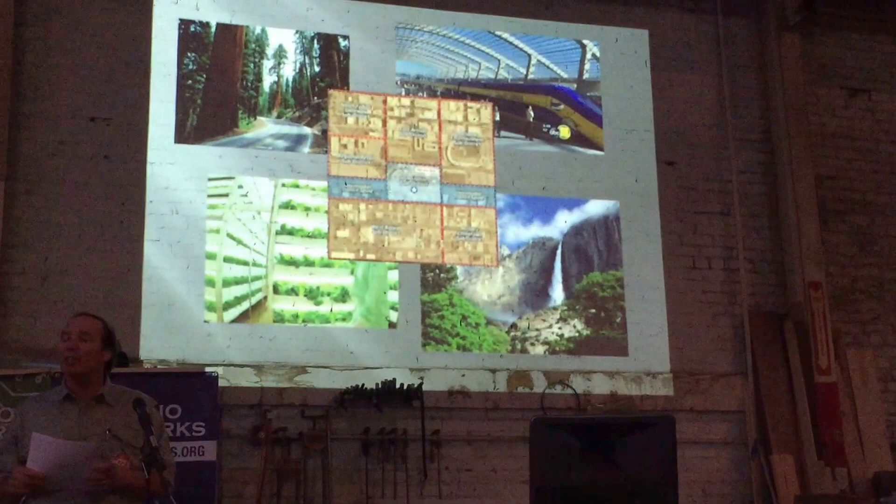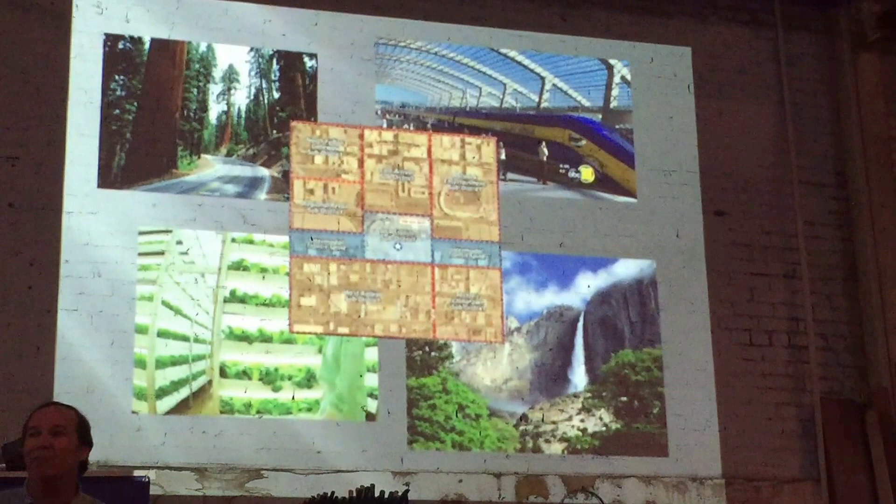All right, so our site plan is generally located in and around the high-speed rail station, close proximity to Yosemite, Sequoia National Park, and Kings Canyon National Park. We want to capitalize on that because we have a lot of visitors coming in through California. In fact, last year Yosemite Park alone received 4.2 million visitors, so it might be a good thing to get some of those folks to stop by our site.

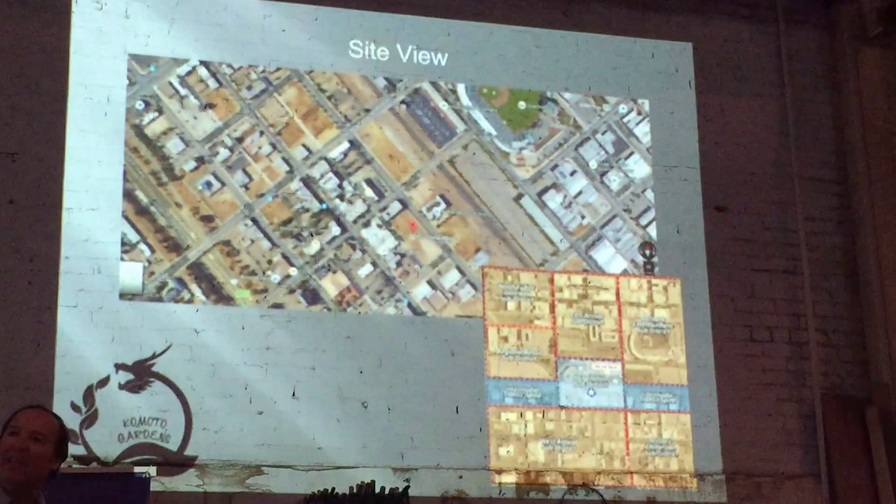Next slide. Okay, here's the aerial footage of the site, and we are the red dot up there if you can see it. That puts us exactly in the proximity of the high-speed rail station.

So there's going to be special zoning, and our zoning at the site was RMX for residential mixed use. The zoning required us to have a height restriction of 75 feet, so we had to work within that, couldn't go up too high, and also limits on the number of residential units. Believe it or not, we have 37 residential units in here.

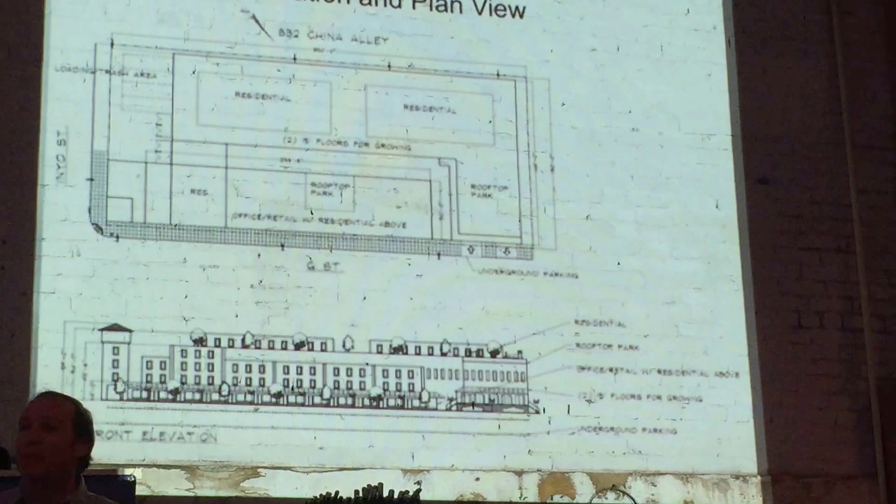Can I have that laser pointer, please? Just push the red button. And right about there is going to be my spot. Right there, that's going to be my new place. That's it, I'm buying in on this one.

And let's see, we also provide on top of the rooftop the solar arrays, and that'll be about 23 feet for the solar panels.

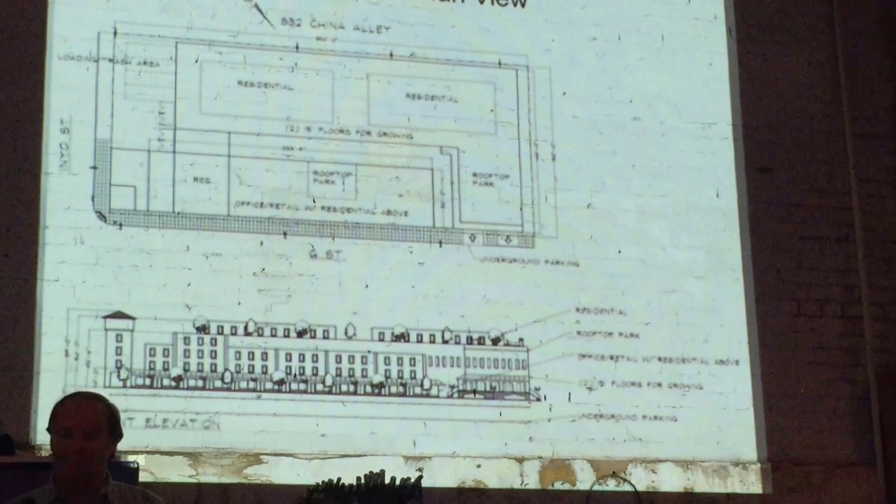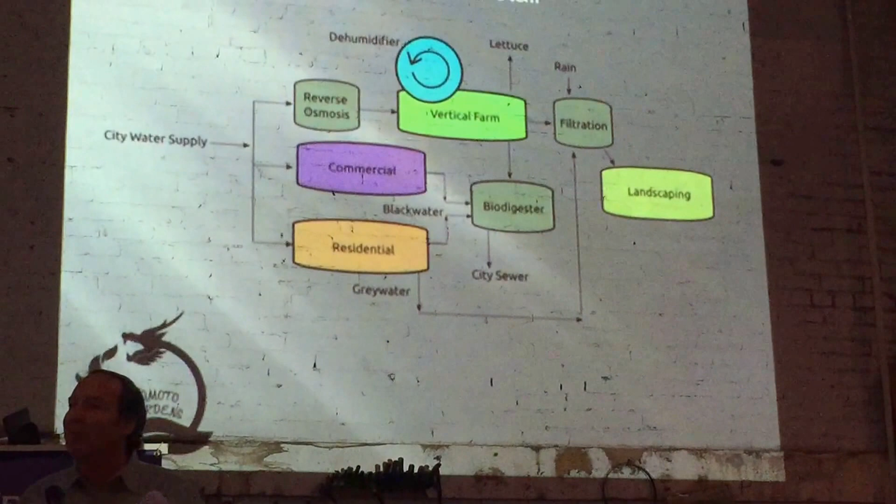Let me give you an example of a systems detail for the water system. This is how some of our water is flowing in the building, and we're going to capture this. We'll take the gray water, run it through digesters and filtration units, reusing a lot of the water, with gray water plumbing piped throughout the building. We felt this was pretty important.

Next slide. Okay, so we all want to know about costs, and we did our best to estimate a lot of the costs. If we had more time, by tomorrow we would probably have the full-blown spreadsheet with cost analysis. However, what we do know today is that we're going to harvest about 14,000 heads of lettuce a day.

We decided to go with a monocrop in this case because we can get the lettuce to grow in a very confined area, since we're limited on the volume we have at the site. We use about 30,000 square feet of garden, but we're actually simulating 3.8 acres of growing lettuce. Imagine growing lettuce in such a tight, confined space—we're only using a quarter gallon, just a quart of water for each head of lettuce, instead of 10 or more out in the field.

So we feel this is a very economical way of going about it, and we are certainly able and flexible to move into other crops that make good sense economically. But for the exercise, we decided to go ahead and make sure we had a monocrop that we can identify numbers with, okay?

And so the annual revenue on 14,000 head a day, 360 days, we've got a couple days in there for maintenance, we're at 3.8 million, or 3.6 million. So I think we did pretty good there.

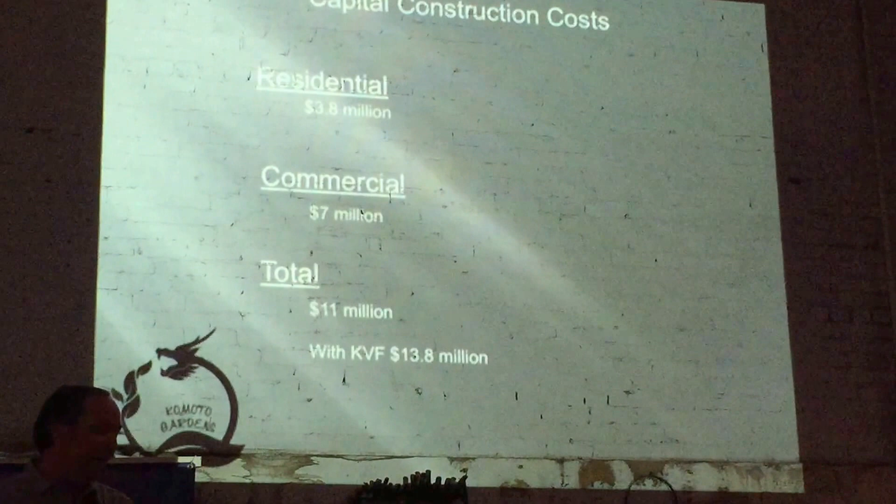Now the total, next slide please. So off the revenue streams, just for the residential will be 3.8 million, the commercial, 7 million, that's a total of 11 of course. And then when we add in the capital costs for the vertical farming operations, we're coming in at around 13.8 million, which we feel is kind of a feasible project to do, and it's worth going to the next step for a feasibility study. So we're kind of proud to be staying within all the confines of the zoning restrictions.

All right, nuts and bolts. Okay, the vertical farming operation is a nutrient film technique, again within the 2 floors of the site. It's a controlled environment, we're going to use lighting, so for whoever asked a question about sunlight and all that stuff, everything is controlled. We want to be able to control everything, maximize it, and make it as dense as possible.

Again, the lettuce using a quart of water instead of 10 gallons of water out in the field has been very appealing to us. And then, if I may, one more, I'll expand on the management company.

So we feel that we want to work with the landowner, and so the management company of the entire site would be responsible to the landowner. So we really want to emphasize that responsibility that we're going to take and how we're going to design the sustainability and how we're going to build.

And then the other entities that make profit, like we'll have our own energy company within the site, selling energy to the residents. They can choose to take energy from PG&E, or they may want to buy our energy at a lower cost. Also providing costs into the vertical farming operation, commercial operation, and so on and so forth. And that's what that systems plan was really all about.

Okay, Scott, questions for Komoto Gardens? Can we see the site plan again, the building? Yeah, that's one. Okay, so what's the tower off to the left?

This tower right here? Yep. Just to bring, I guess, some attention to the property from the corner. We are required to have 50 foot off of each corner, frontage on the road, so we decided to make it a focal point. We could also use it for storage if we wanted to, we can make it a lookout, there's lots of different things we can do with it.

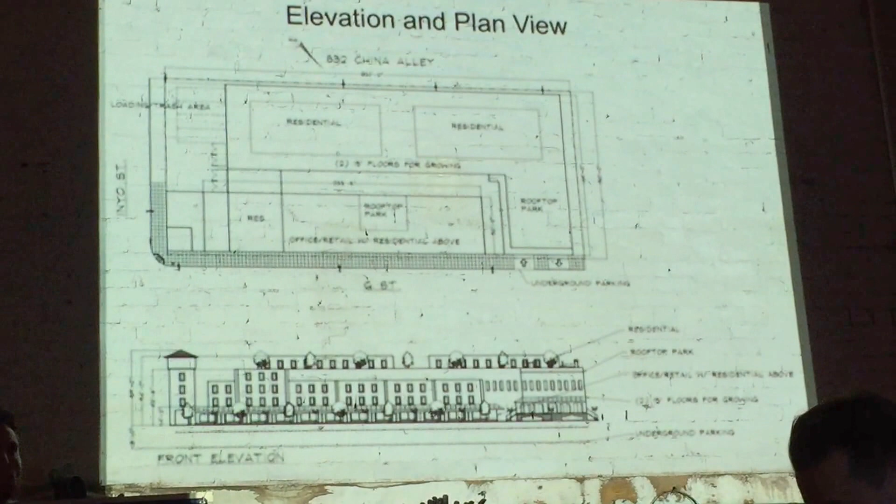Okay, will all parking be underground? Yes, all parking is underground, we have 2 levels underground. Kind of hard to see the dashed lines.

Oh yeah, I got it. But there is underground parking, okay, I see, 2 levels. And so moving up, what's floor 1, floor 2, floor 3, floor 4?

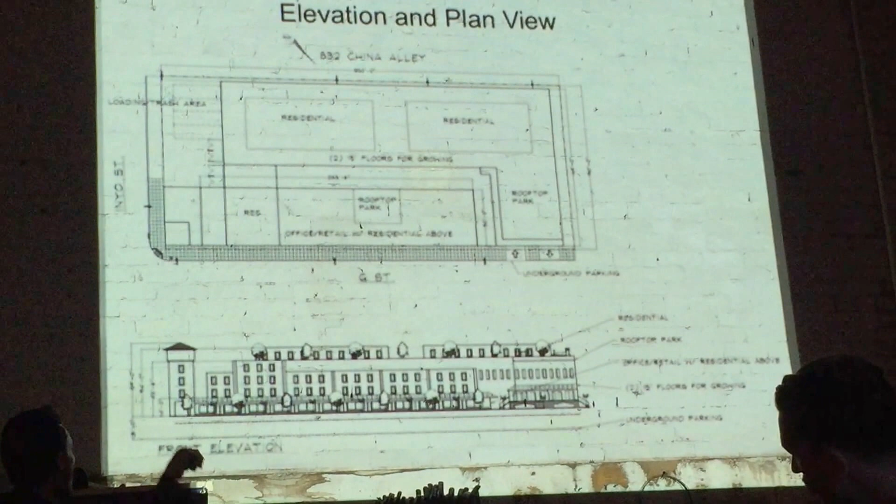Yes, it's all commercial, retail. 80% of the frontage needs to be retail. So that could be restaurants, little shops, offices. Then we have 2 floors of residential.

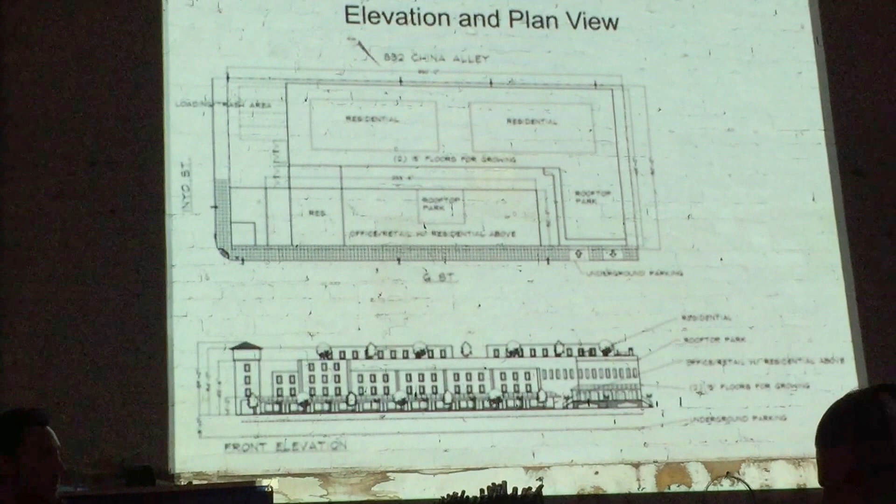And then also on top of the main farm building is more residential space. When you say the main farm building, how many buildings is this actually? There's 2. There's this main building here, our farm, and there's this building in front, which is the office retail space with residential above.

Okay, thank you. Great. Doug, questions? Well, I'm curious about the energy.

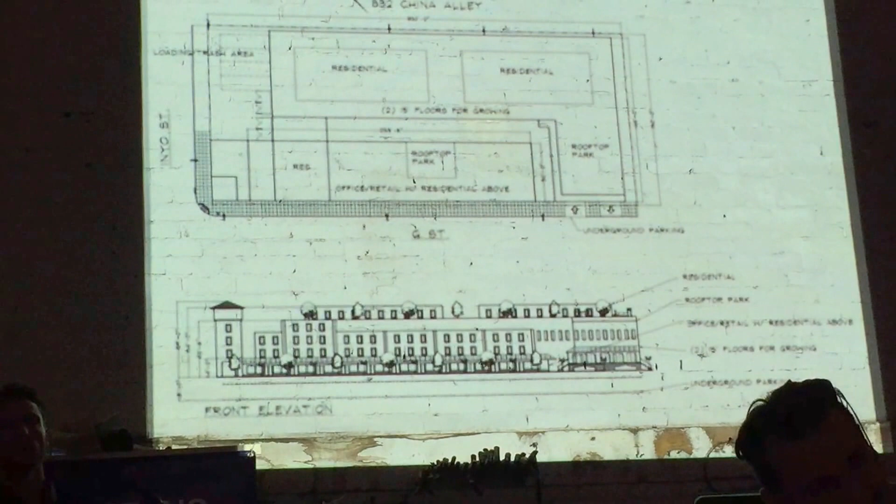You mentioned selling the energy to the residents. To run the facility, do you feel you're producing enough energy to run the facility and provide to the residents and the shops? We will utilize essentially all of the energy that we can produce.

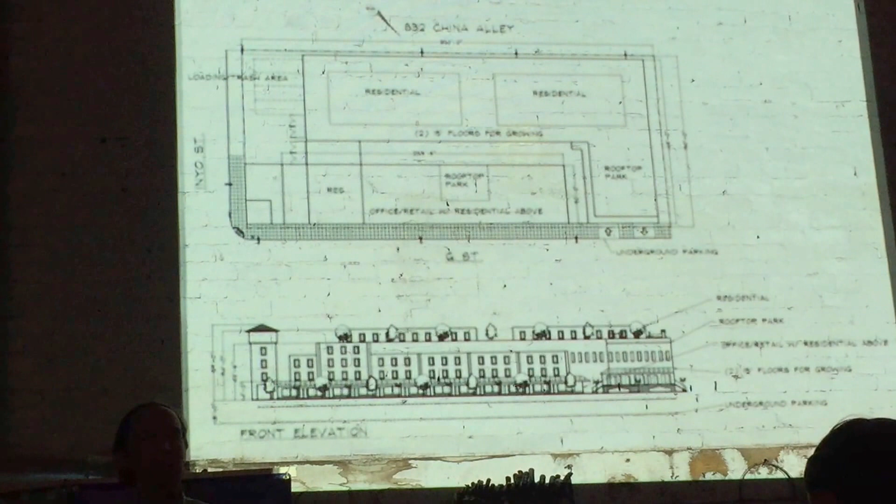We also have in the strategy an air compression energy storage concept, which would be below the second basement floor, to store and compress air so we can buy electricity at off-peak pricing. And then when it comes peak time, we can release the air to generate electricity, so we can use our electricity from off-peak storage.

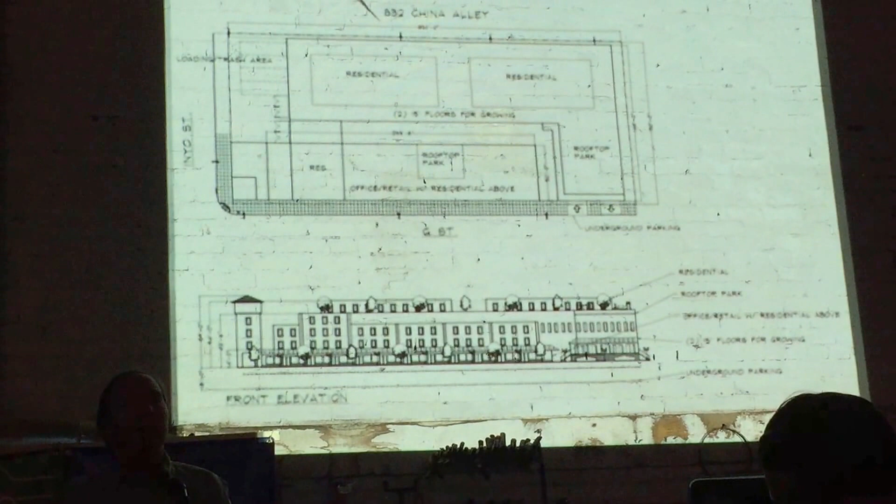So it's just an energy storage concept, and it uses air compression, so we don't have a lot of batteries on the place that could explode with the extreme heat that we get around here. I think that's innovative. I really like the part about recycling.

Great. Tom? So approximately 21,000 square feet for the PV, is that correct? Correct. So is that, do you know what size solar system that would be?

It'll produce, I think someone calculated, about 1,000 kilowatts per day. I don't know more details than that. I remember it was going to cost about $1 million.

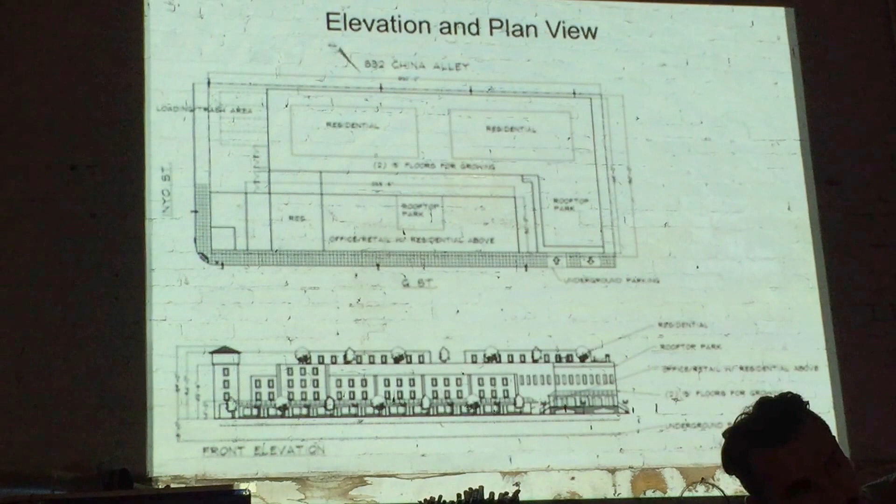$1 million? Yeah. So 21,000 square feet should be about, if it's oriented south, maybe about 28,000 kilowatt hours a month, so about 1,000 a day. That was going to be my question too, whether that energy... it sounds like you thought a little bit past that, so I like that.

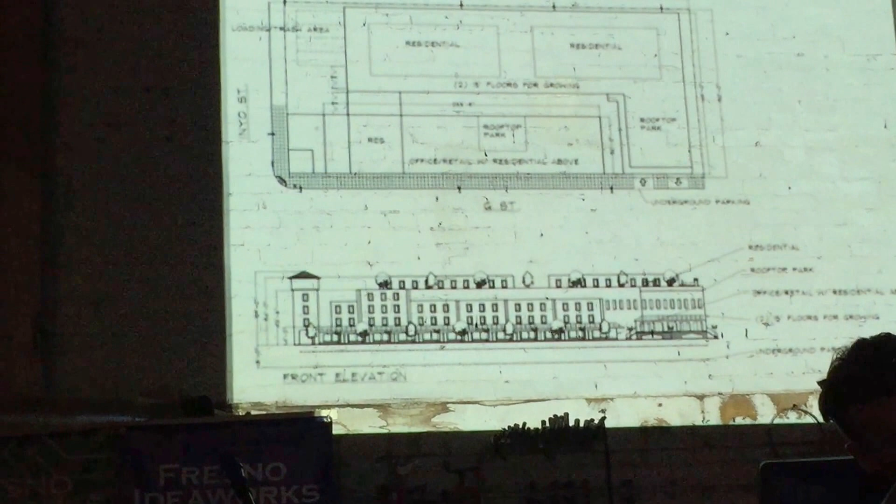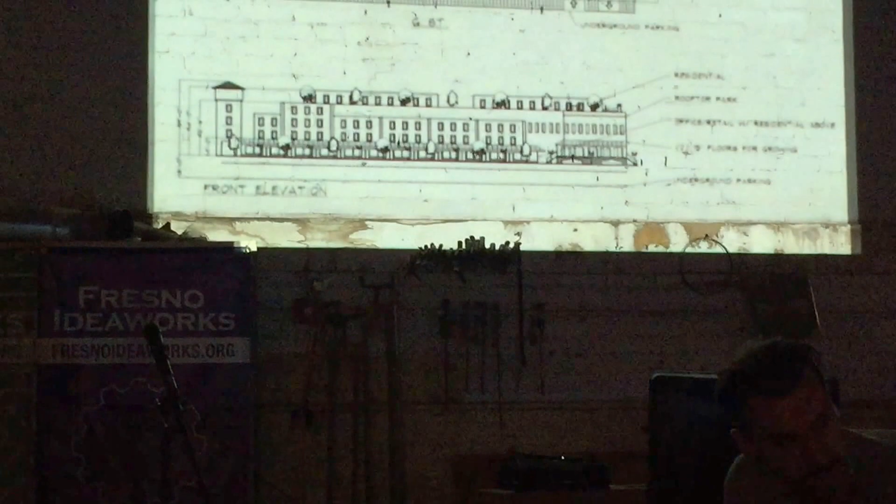We have had a little conversation, Sarah. We just talked a little bit about tax credit possibility, and that was it. We really didn't go into it in detail. Wasn't required of them, but it's still a good question. Yeah, I really like the details you've gone through, thinking through different business components, energy, monocrop, all that.

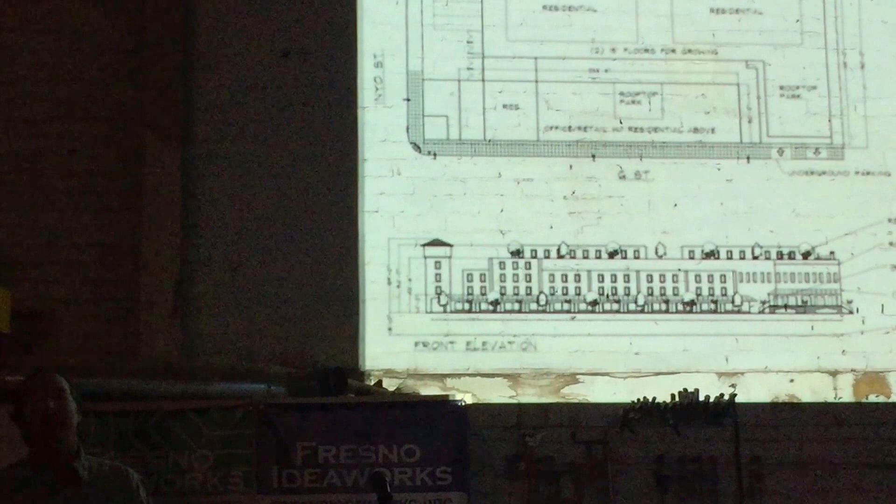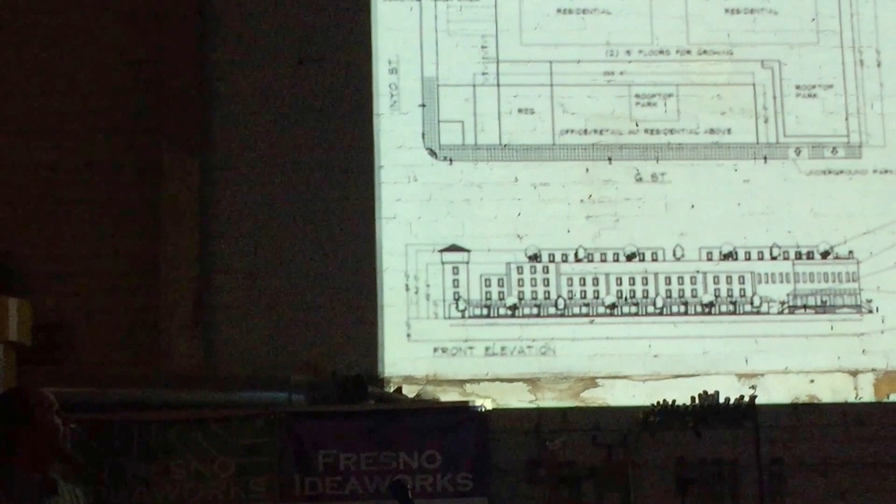How much would rent be for a person to live there? Rent would be the same as anywhere else in Fresno, comparable. We don't want to charge too much. It's also a very poverty-stricken area, so we need to keep costs down to provide homes for these people.

We talked about having a variety of sizes in the housing, so there might be 1,000 square feet all the way up to 1,800 square feet in the units. We figured, I can't remember whether the average was $1.75 for commercial, and then it was $1.20 for residential per square foot, based on research into what residents are currently charging for rentals in this area, which would be about $1.25 a square foot.

Per month. Great, thank you.